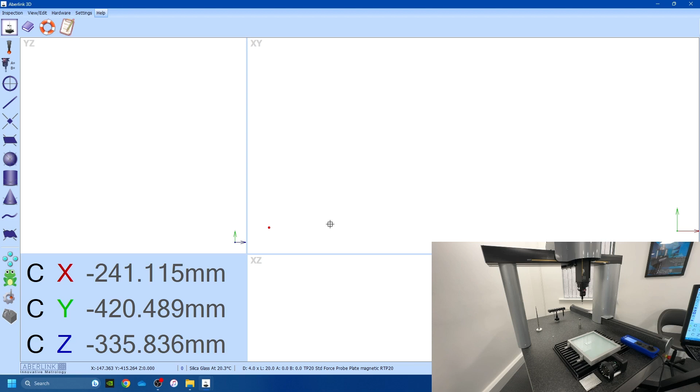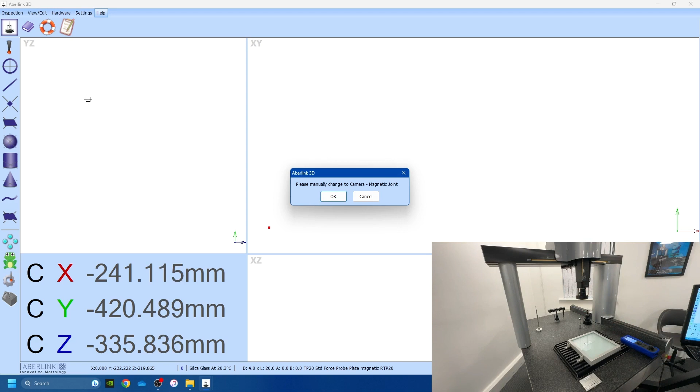Now, if you have covered the previous steps and the camera is set up and calibrated, we can go ahead and switch to the camera now and get some measurements. So we go to the top left corner and select probe, camera magnetic joint. The software will ask us to change. We roll the probe forward and off, keep it somewhere safe. We can then connect the camera, and at this stage we can press OK.

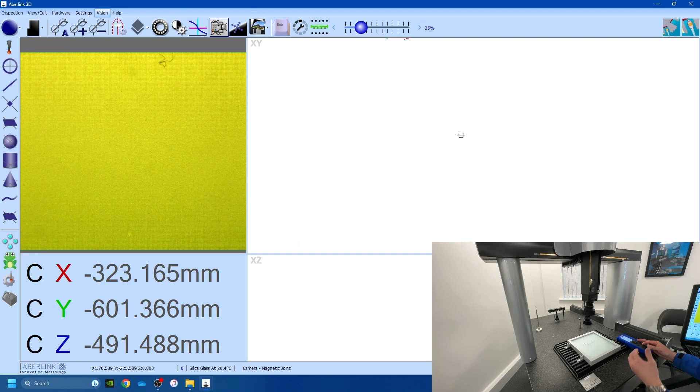The software will switch the camera on and turn on the vision option, and we are now ready to get some measurements. Before we can gather any measurements, we need to make sure that the camera is looking at the artifact or component that we are measuring, and we also need to make sure that the image is in focus. So using the joystick, as this is quite a big sweeping move and we also need to get the Z height correct, we will drive over to the component.

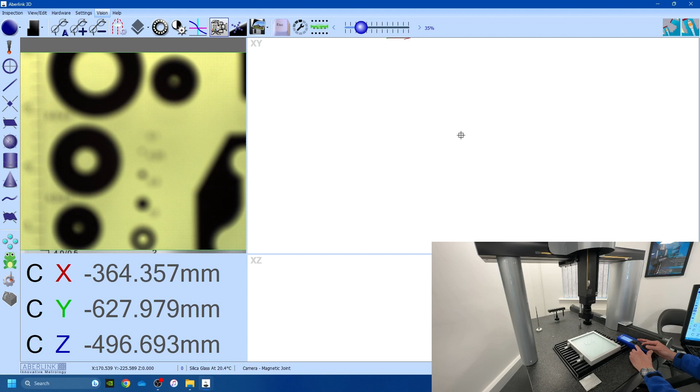In this case we are using the glass graticule again. This is the easiest to do training and measurements and calibration on, so that's what we'll be using for this exercise. And you can see I'm just using the joystick to drive over, and then I'll rotate the Z-axis to get it somewhere near. And that is pretty good. You can stick with that if you want.

If you really want to fine tune it though, you can use the autofocus. So it's these reading glasses with the letter A next to it. Click on that. The software will jiggle the camera up and down, trying to find the best focus. There we go.

And at this stage, it's generally a good idea, if the part is the same height, to lock the Z-axis. This can be done on the joystick with the padlock, or also on the screen via the readouts. So if you use the digital readouts, the DRO, you can right click on the axis you wish to lock and select lock unlock axis. This is an easy option if you don't have the touchscreen joystick. Okay, at this stage we are ready to measure.

As mentioned in a previous exercise, you can also use the light ring if you are struggling to get a good edge on the feature. Again, this is ring light controls. Left click on the large ring. This does the bright LEDs. You see this actually offers too much of a reflection, so we will not be using it in this exercise.

And if you're also struggling to differentiate between the part and the backlit plate, you can use the UV. This sometimes gives a sharper edge. In this particular case, it makes it worse. So most of the stuff that I find, you don't need to use either LED. You can just use the camera as is. Okay, we are ready to now start measuring.

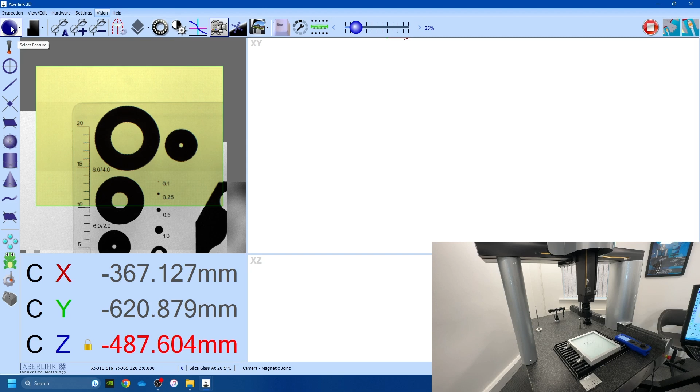And before we measure, we need to make sure we select the correct feature. So this is in this feature selection window. The drop down box, we will choose circle. And because we are measuring an edge, we need to make sure the inspection method is set to edge detection.

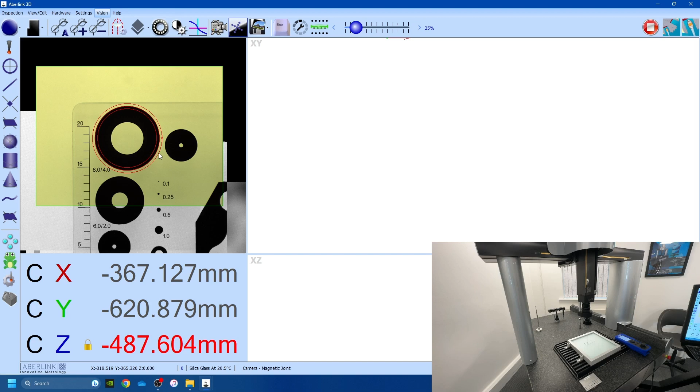Now we are ready to measure. We will define the circle with 3 left clicks. So 1, 2, 3. These are evenly spread on the outside edge. We then slowly move the mouse outwards. This defines the scanning window that the software will use to look for an edge. And the 4th left click starts the scan. So there's the 4th left click.

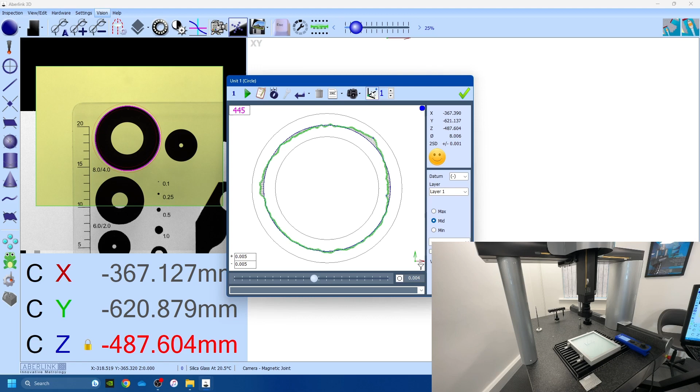The software now looks for an edge within that scanning window. This is logging the points here. And you'll see it defines the feature. So it's an 8.006 circle with a 4 micron roundness. And because we are going to do a program, we will set this as a reference. This is now the origin of our program.

This green window is showing the Vision software's or the camera's field of view. We always want our measurements to be in the center or as close to the center as possible. So I'll move the camera now to step forward so we can get the 6mm in the middle of the view. We do the same thing again. We don't need to reselect the circle feature. It is now in circle measuring mode. So we do the same thing again.

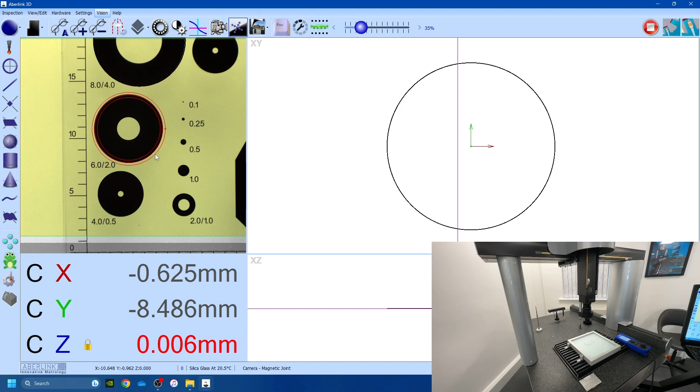3 left clicks. 1, 2, 3. Move the scanning window just outside. We don't want it too big. We don't want it too small. This is probably just about right. And the 4th left click starts the scan. So we hit the green tick and you'll see it writes the feature into the software.

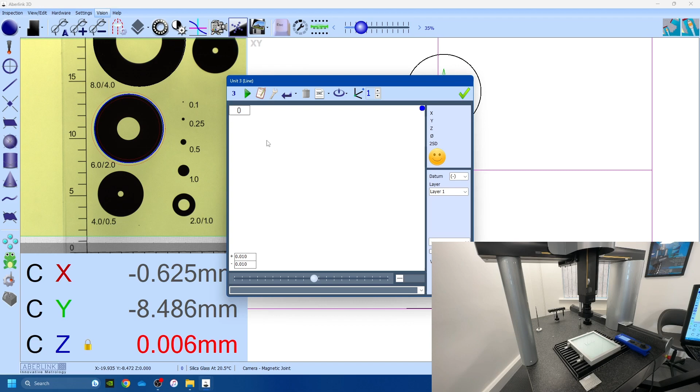We would like a rotational alignment, just as we do with our 3D system. So we will construct a line between the two and set this as a reference. And this is now using that alignment as the reference system.

And to finish off the circle measurement, we will do the 4mm also. So 1, 2, 3, move it away, 4. That executes the command. And again, it writes that feature to the software.

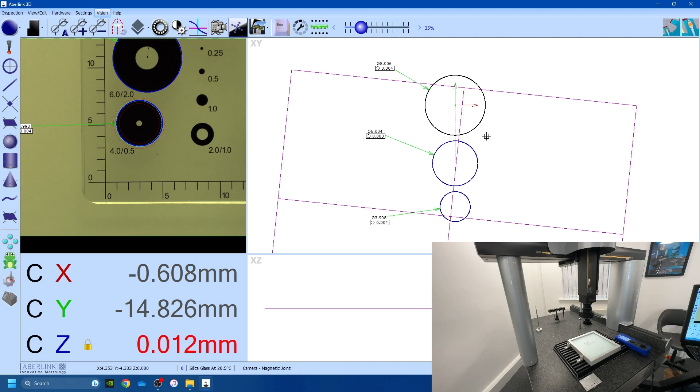We can now dimension this like anything else in Aberlink 3D. So we double click the circle, move it away, drop it down, double click the circle, move it away, drop it down. And we can also dimension between the features as so.

If we right click on any of these, we can fill the tolerances in. This is outside the scope of this training exercise. It works exactly the same as the standard software, so we'll not go into that. But we have now measured the 3 circles in a program.

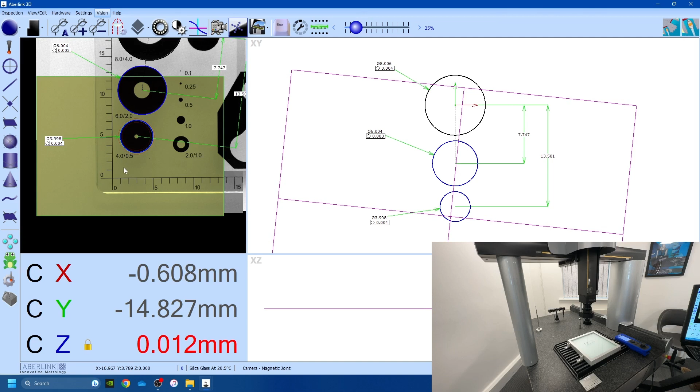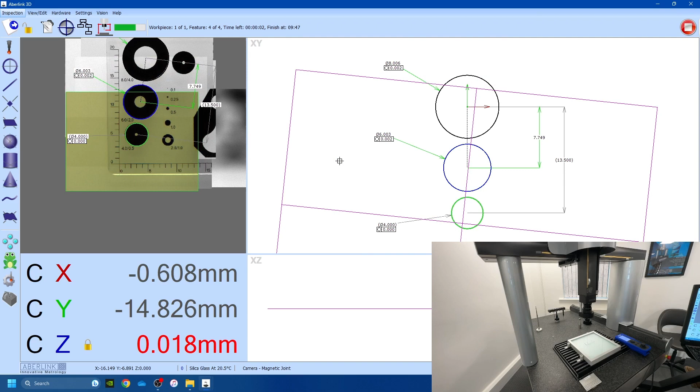And we can run this program back if we want. So inspection, play. Click yes to this, and you'll see the camera automatically goes to the location, scans the edge, picks up the next circle, moves, picks up the next circle, and updates the dimensions on the screen. So that is how we measure circles with the camera and vision software.

We will now measure some lines. So this will be done on the middle profile section of the graticule. So again, we'll zoom in. So in this particular case, we need to switch now from circle to line in the select feature drop down box, so make sure you're on line. We're still going to use edge detection, and the line works off 2 clicks to define the line.

So we'll click here, that's 1 left click, and here 2 left clicks. We now move in or out to set the scanning window. This works the same as on the circles. We don't want it too big, we don't want it too small, but here's okay. And then the 3rd click starts the scan. So you'll see it picks up that edge.

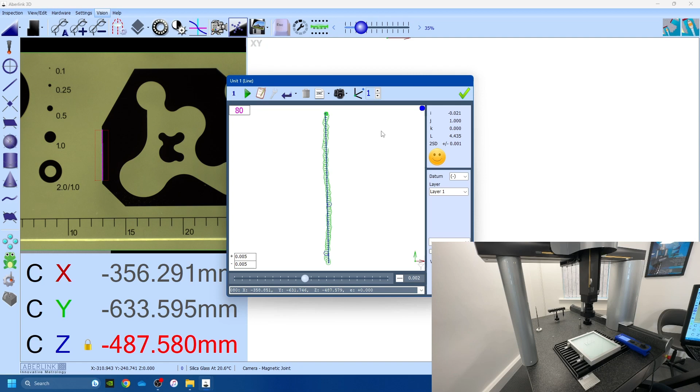Again, we need a reference system, only a 2D reference system as we're not measuring planes. So we will set that line as a reference. We'll then measure this line, so 1, 2, set the scanning window by moving the mouse outwards, and 3 sets the scan. We'll hit the green tick as we can't have 2 lines as a reference.

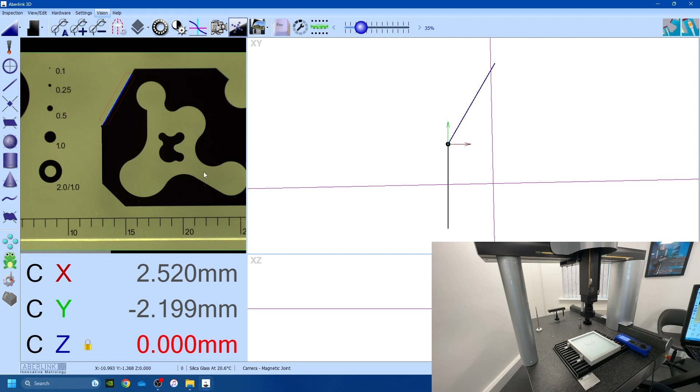And we will construct a point where the 2 meet and set this as our origin. So point, construct, left click on this line, left click on this line, set this as a reference, and we now have a full coordinate system. We can go around taking some more measurements.

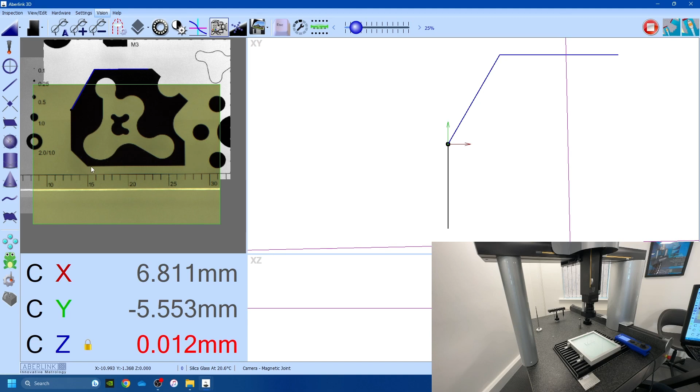So 1, 2, scanning window by moving out, and 3. Again, I'm trying to move whatever I'm measuring to the middle of the field of view. So 1, 2, scanning window.

1, 2, scanning window. And you can start to see we have the features written into the software, and they can be dimensioned just like normal. So left click, left click, left click, left click, and we can also define the angles by clicking between them.

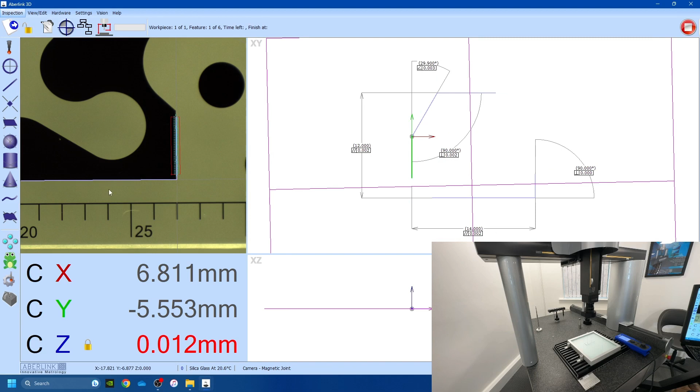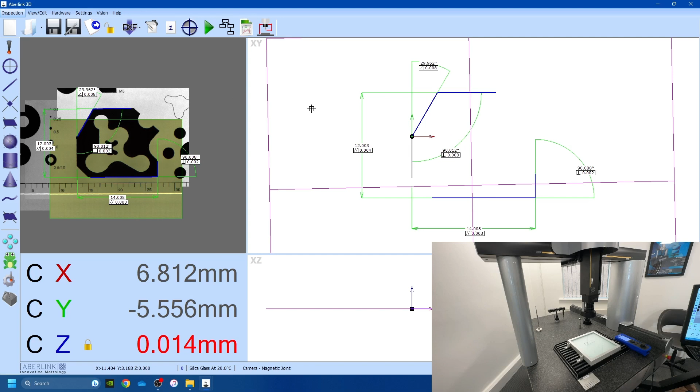As mentioned, I'm not going to cover the dimension and tolerancing. This is just an example. And as the previous exercise, inspection, play, click yes to that. You can see the camera will move and pick up the measurements just as we selected them, and update the dimensions. And that is a fully functional program measuring lines.

We will now measure some arcs. This is used when you don't have a full circle to measure, so any radius or little curves of arcs where it's not a full circle, we will use the arc feature. It is defined very similar to a circle. So I take arc. Again, try to get the thing you are measuring right in the middle of the camera field of view.

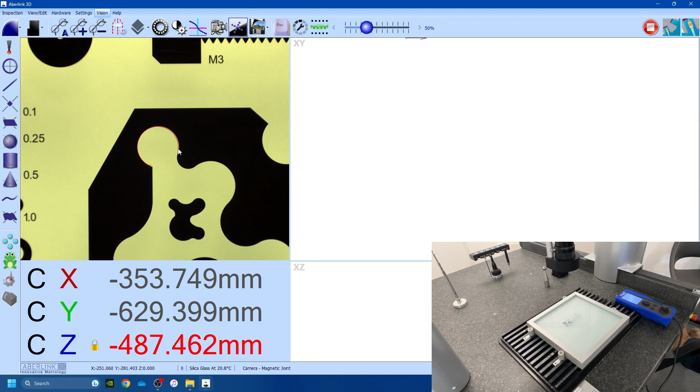And we define 3 points just like a circle. So 1, 2, and 3. Move the scanning window just like the previous exercises, and the fourth left click executes the scan. So we'll use that as a reference, and you'll see it displays as a radius. It also dimensions as a radius.

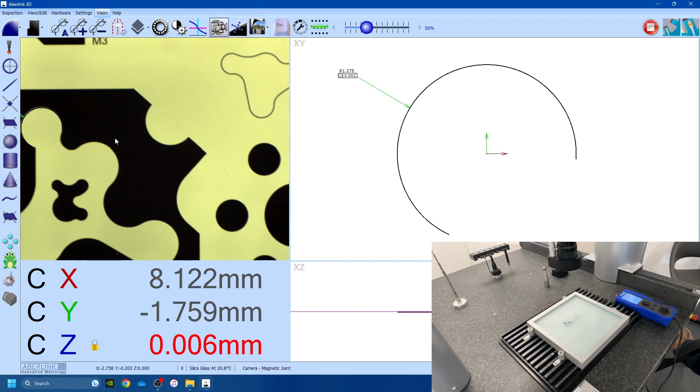We need a reference system, so let's go ahead and get some more measurements. We'll do this one now. So 1, 2, 3. Hit the green tick, and we'll draw a line between the two. Set as a reference, and that is the coordinate system fully defined.

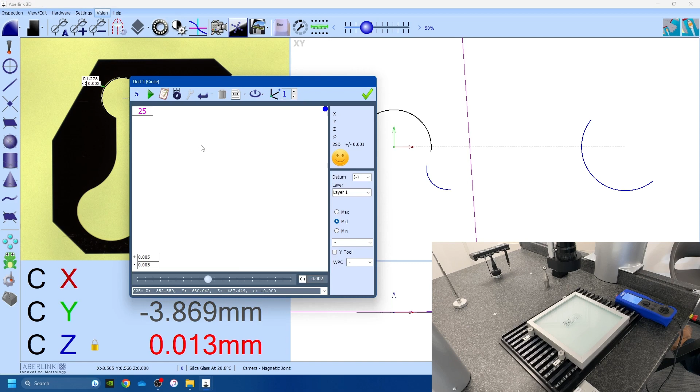Let's get some further measurements. So 1, 2, 3. 1, 2, 3. 1, 2, and 3. Hit the green tick. Let's get some more dimensions. This is where you can really see the vision system and how functional it is. Measuring small radius like this. Highly accurate and precise.

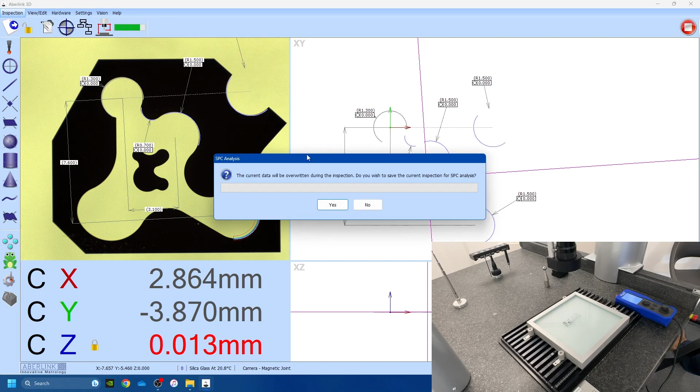There we go. And just like the previous exercises, we can run this program back by going to inspection and play. Click yes for SPC. And you'll see the camera moves, looks for the defined scan area and picks up the edge. The dimensions then get updated, and at the end you get your summary. There we go. That's a quickly ran program. And that is how you measure arc features.

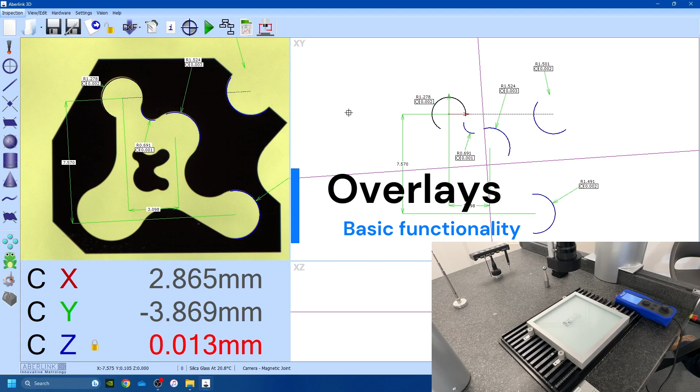As a final update to this video tutorial, I would like to just highlight, as you might be aware already, the overlay feature. So this is in Vision, and it's this sort of 2 sheets of paper on top of each other, or a sheet overlaying the other one. We call it overlays, and it allows different overlays within the Vision software itself. So at the moment you'll see dimensions. If I turn that off, the dimensions no longer display.

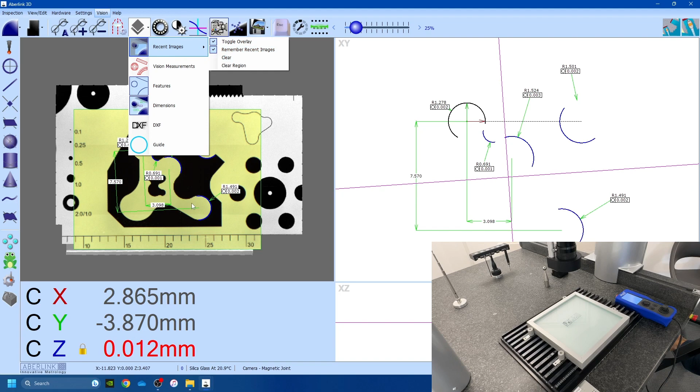You can also have features. And the other useful one is the recent images tab. So if we have toggle overlay and remember recent images, you'll see that we can actually use this feature. Every time the camera moves and pauses, it will log the image in the Vision software itself. And you might already be able to see why this is useful. It allows bigger single measurements for features that don't fit within the field of view. We will cover this in the next advanced exercise, but it's good to cover it in here so you can see how it functions.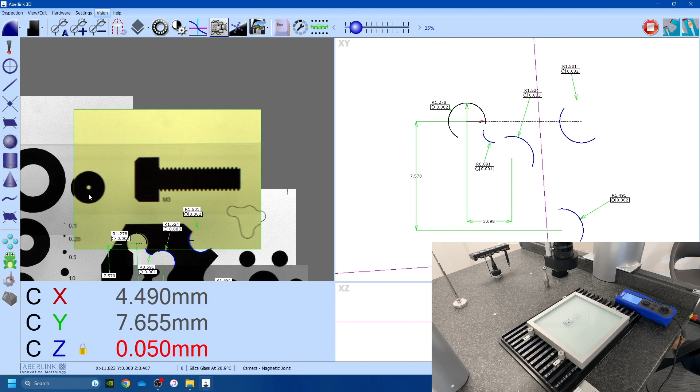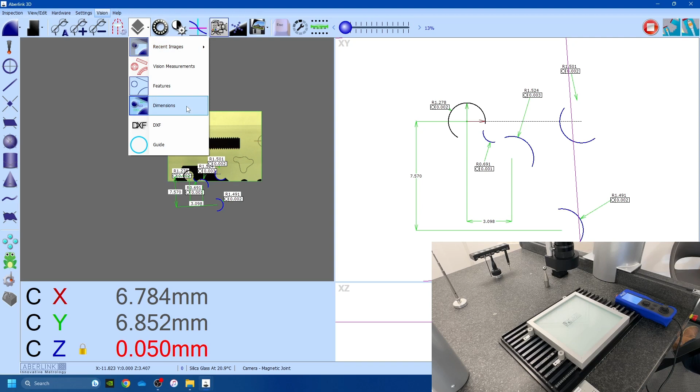So every time it pauses, it logs that image, and you'll see it logs all of the images on the screen at once, giving us a bigger field of view for measuring larger components. So this is the overlays toolbar here, and the different options are in here. If you need to clear the images, we say clear, and we go back to how it was. That is the overlays feature.

This concludes this video tutorial. Please move on to the next one to cover advanced functionality and all remaining features within the Vision software itself.